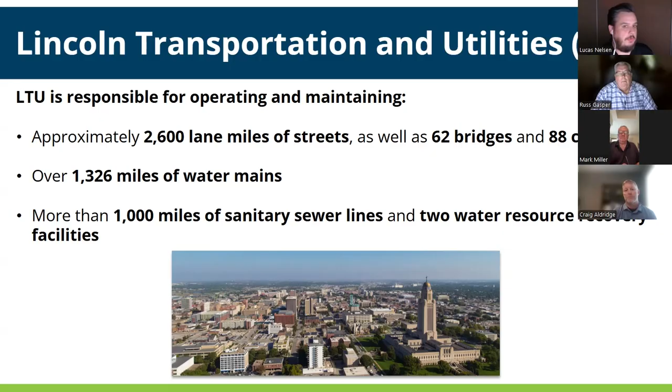Just a quick note about general improvements to infrastructure in Lincoln. LTU invested about $53 million in transportation infrastructure in this last fiscal year, including an estimated $18 million just from the Lincoln on the Move quarter-cent sales tax. And Lincoln on the Move specifically has helped to improve over 220 lane miles of Lincoln streets since it began in 2019. And that quarter-cent sales tax helps contribute about 25% annually to the transportation budget.

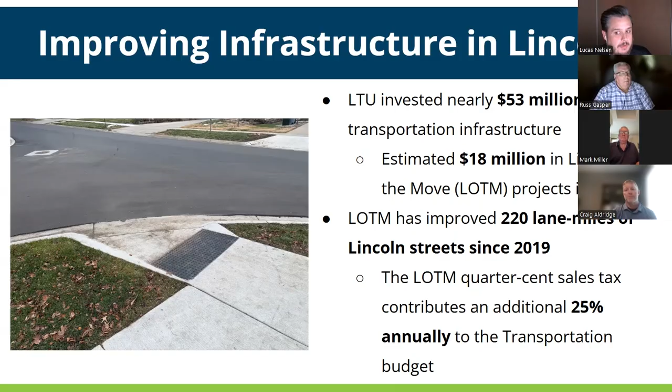For 48th Street specifically, I just wanted to provide some quick details about the corridor as well as some of the outreach we've already done on this project. The original paving district was actually created in 1927, and the street was widened from Newton to Pawnee Streets in 1983. And the most recent resurfacing actually took place in 1999.

For this specific project, we held an open house in early December of last year just to present some design options at the intersection of 48th and Sumner Streets. We did that because the current signals at that intersection are at the end of their service life, and a replacement signal was not warranted. And so we wanted to bring some different design options to the community and get their feedback on what the final design could look like. And with that, I'll actually throw it over to Craig for some specific project information.

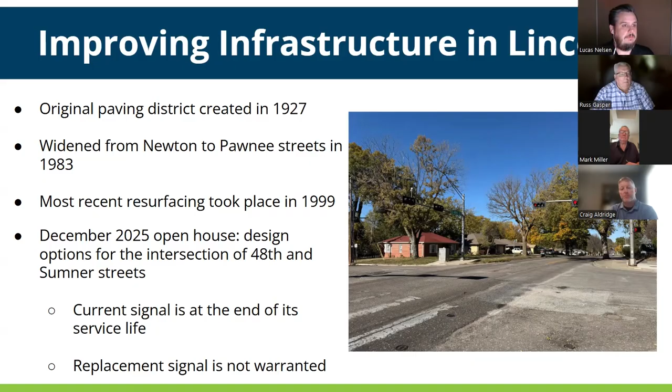Yeah, good evening, everyone. Craig Aldridge, LTU, Senior Design Engineer Project Manager, been in that position for about 22 years. I think the main purpose of this meeting really is going to be to get to the end and answer any questions that you have, but at a very high level, I'll provide a project summary of what we're going to do on this street rehabilitation project very briefly. The next 5 or 6 slides, and then we can get to the end and answer specific questions that you might have.

But basically, to regurgitate what you see on the screen there at a very high level, we're basically going to be peeling back the top layer of asphalt on this street and exposing the underlying base that really supports that top layer. And making repairs to that base, whether it's joint and crack sealing, whether it's full removal and replacement. That's to be determined once we expose that top layer. In addition to that, we will be replacing the outside limits of the street, which is the curb and gutter. And that also will include any curb inlets in that area that are deficient or cracked or outdated.

We'll be replacing those inlet tops and kind of armoring them, putting a steel plate on those to make them stronger, make them last a little bit longer, and absorb those impacts from vehicles that might hit them. Once we get the top layer pulled back and those base repairs done, then we're gonna put a brand new layer of asphalt on that street, make it nice, shiny, and smooth and black.

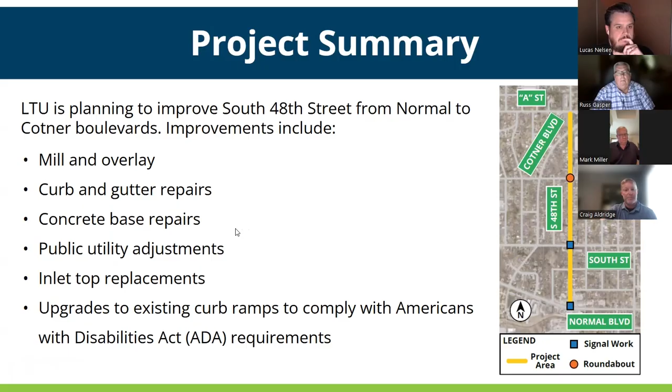And then we'll go ahead and put the pavement markings, nice durable pavement markings back on there that are going to last a long time. And then the last bullet point there is in addition to that, at all of our intersections, we're going to make upgrades to existing curb ramps for our pedestrian friends that use this corridor to make them ADA compatible. So next slide, please, Lucas.

So maybe to drill down a little bit farther, there's two blue dots and one red dot on the map that's on the right side of this slide. And I'll kind of work from south to north. At 48th and Normal, one of the specific improvements that we're going to make there is actually replacing that traffic signal pole and the traffic signal infrastructure on the northeast corner at 48th and Normal.

In addition to that, we'll be making some geometric modifications to hopefully make things a little bit safer for traffic trying to navigate north through that intersection, northbound on 48th Street, north of Normal Boulevard.

Moving a little farther north, once we get to South Street, we'll actually be removing that existing signal that's at 48th and South. It's reached the end of its useful life. And we're actually going to replace that signal with an updated and upgraded signal at that same intersection.

And then moving farther north up to Sumner Street, that signal is not warranted. It currently doesn't meet any of the minimum thresholds for either vehicular or pedestrian traffic through that intersection. So we're actually going to remove that signal. And based on the feedback that we got at the public open house, we're going to install a mini roundabout at 48th and Sumner. Next slide, please.

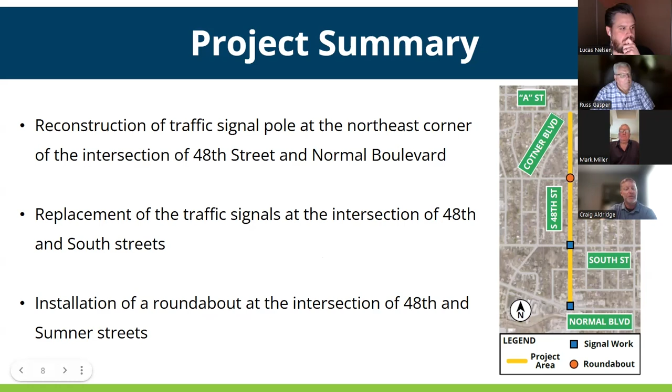So talking about access during construction, that's a very important thing, especially for people that navigate the corridor, people that live along the corridor. To do these repairs as cheaply and as quickly as we possibly can, the best way to do that is with a full closure to the street. And so that's what we are allowing our contractor to do in this corridor, completely close that street to make those repairs.

That being said, we will maintain local access to residents at all times, and access for emergency services to Bryan Hospital on the northeast corner of 48th and Sumner will be maintained at all times. There may be some times of temporary inconvenience for homeowners that access 48th Street directly.

If there happens to be an area where some of the base layer, when we peel that asphalt back, is in a state of disrepair, there may be some times when they have to form that up or pour concrete there or let the concrete cure, and we're going to try to work with homeowners and provide the best alternative access to their house that they possibly can.

But I would say 95 to 99% of the time, we should be able to maintain access for local residences. And again, access to Bryan Hospital on the northeast corner will be maintained at all times. It may not be the most direct route along 48th Street, but we are actively coordinating with Bryan, with Lincoln Fire and Rescue, and LPD to maintain access to that campus at all times. So with that, next slide, please, Lucas.

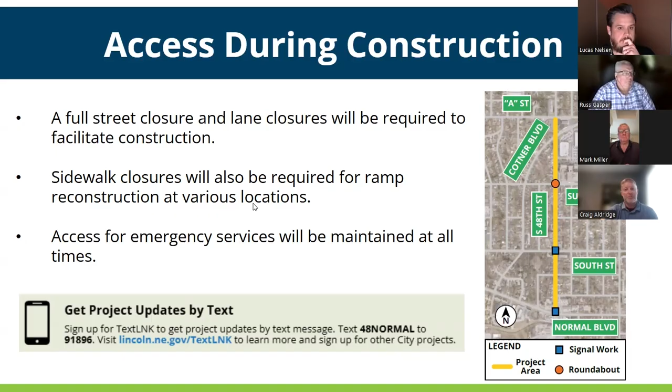So just at a very high level, I'm sure many people have probably already seen this slide. I think we have a web page on our city site, lincoln.ne.gov, dedicated to the benefits of roundabouts. But again, kind of a high level summary of why we in the engineering community feel that roundabouts work.

And the two main points: it really reduces your conflict points as opposed to a traditional intersection, from 32 down to 8. So there's a three-quarter reduction in conflict points going from a signalized intersection to a roundabout. The biggest benefit really to roundabouts is that it reduces speed, and that benefit really is for pedestrians. A reduction in speed of vehicular traffic is always a benefit for pedestrians.

And also, when we do have crashes, the severity of those crashes is reduced significantly. So those really are the two biggest benefits for a roundabout installation at 48th and Sumner. Next slide.

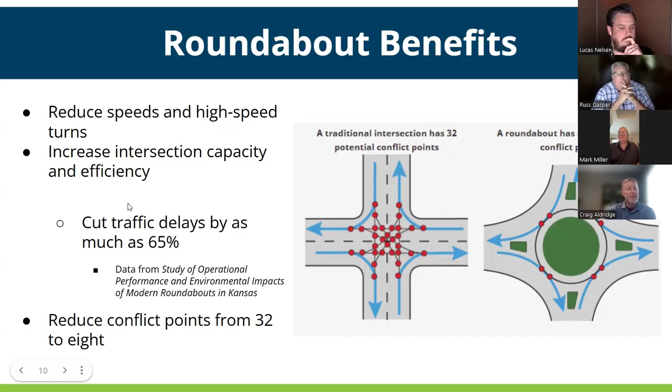I kind of just touched on this a little bit. Maybe a couple of the more added benefits are, there are some long-term operations and maintenance costs that come with the signal. There's electricity, and then there's maintaining the infrastructure for a signal that stands above ground.

So there are lower costs with the roundabout installation over the lifespan of that installation, as well as, just a general intersection operability standpoint. We do see an overall reduction of idling times for vehicles moving through that intersection. That's not to say that it's always the case, but as a general rule of thumb, we do see that reduced idling time for vehicles and better intersection operability overall.

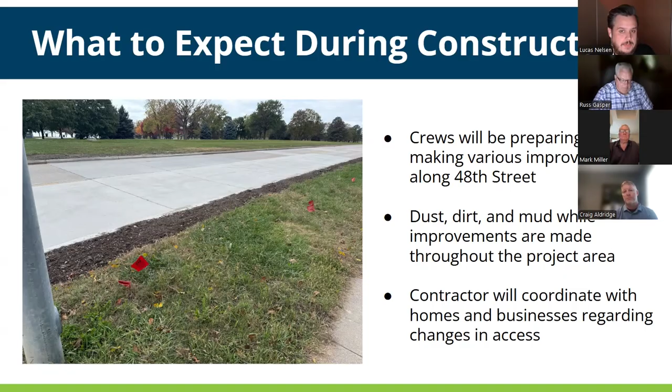We also have our closure map, which gives you that same overview, but just of various closures throughout the city, whether they be full closures or lane closures. And each of those closures usually links back to a specific project or even a project page where you can learn more about the specific project.

And just finally, a plug for Waze. It's a navigation app that we provide our closure information to directly. And so any closures are updated in Waze as soon as we have them available. And it can help guide you around during construction season. And with that, I will jump to questions.

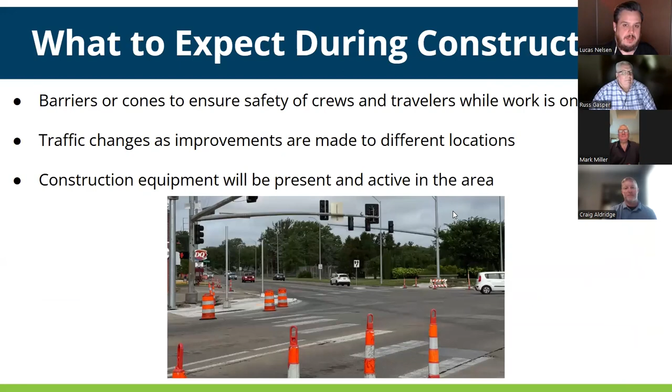And you can actually find more information about a proposed project on A Street if you go to our projects page. You can search A Street from 40th to 56th Street. That project is still in the design phase, and we held an open house for it about 2 weeks ago now. And we have materials from that open house available on the webpage. So you can go there and learn more about that project. As I mentioned, it's in design, so there is time to learn more about it and send any information you might have to Craig.